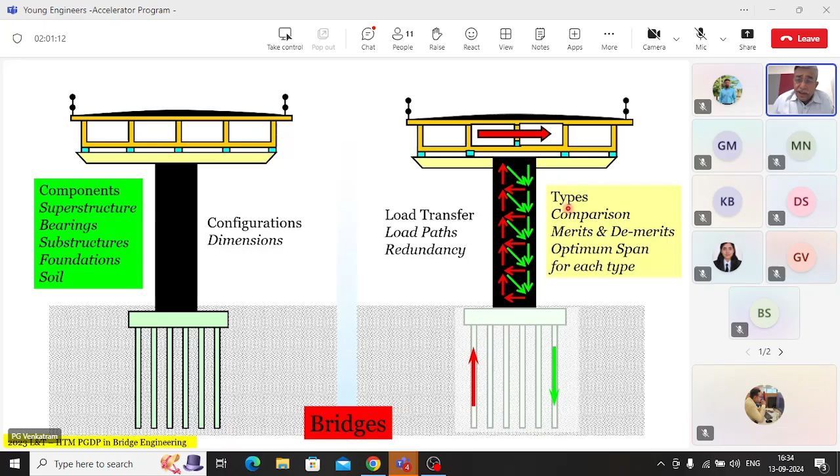So what we will do is we will start this introductory course with understanding of the evolution of bridges and what prompted the changes. We'll start with that, and eventually we'll go to the complex subjects about design, analysis, detailing, mostly at the concept level. Rest assured, I will not take you to intricate mathematical formulation, which will put you to sleep and also will possibly test my own personal knowledge of that level of mathematics.

Because ultimately, somebody like me is at the tail end of my career, and all of you are at the beginning of your career. In the sense, my 40 years are over, your 40 years have just started. So in that sense, what you see in the past will be a reflection of the nature of the path that is likely to be in the future. All right. So let's look at what prompted the changes.

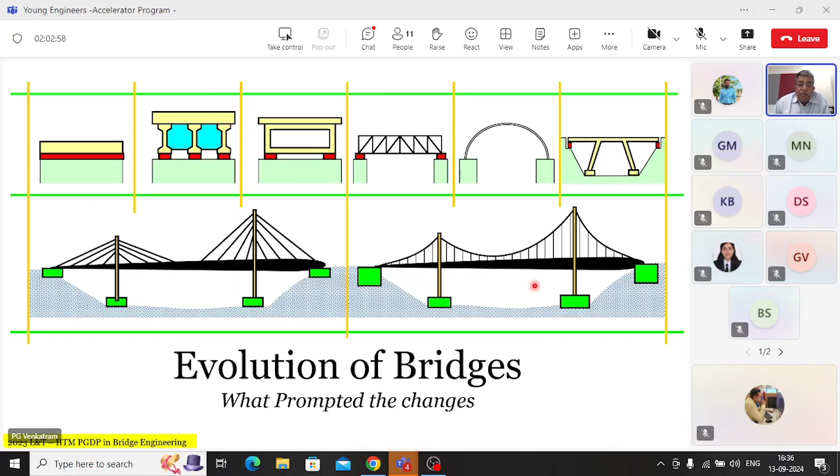Looking back at it, we can divide the whole history into about 5 periods. You can call one prehistorical, then the classical period from BC to AD, or the Christian era, CE as they call it nowadays. Modern day they use BCE and CE. Then you have Middle Ages, early modern, and modern, which is what we are living in today. After a few years, by the time some of you reach my age, what we are doing now will become early modern, and possibly there'll be postmodern, which will come up at that time.

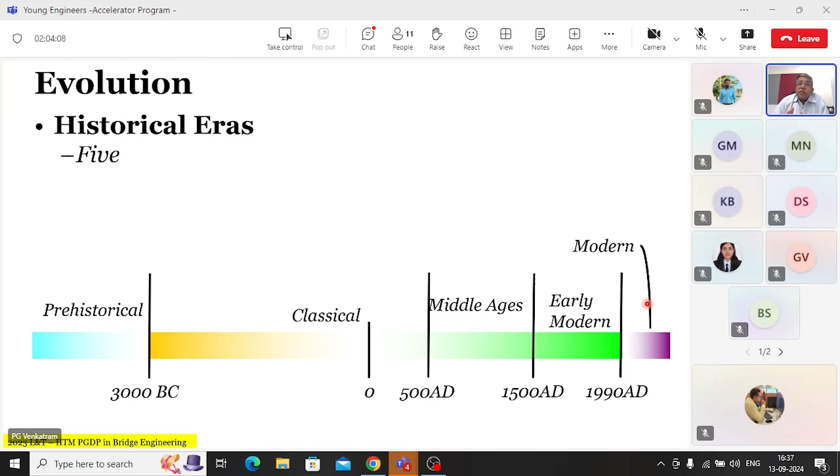Most of the prehistorical ones were not man-made; they were naturally occurring, and something in the form of a semi-man-made, naturally occurring arrangement which has been improved upon by human beings, such as the bridge in Taiwan.

Then comes the classical age. What happened from the prehistoric was only an idea we got. In the classical age, we understood proportion. We did most of the engineering in that era from what is called today gut feeling — load transfer, force, etc. Those terms were not defined yet. The forces, stresses, strains — they didn't have those concepts in the classical era.

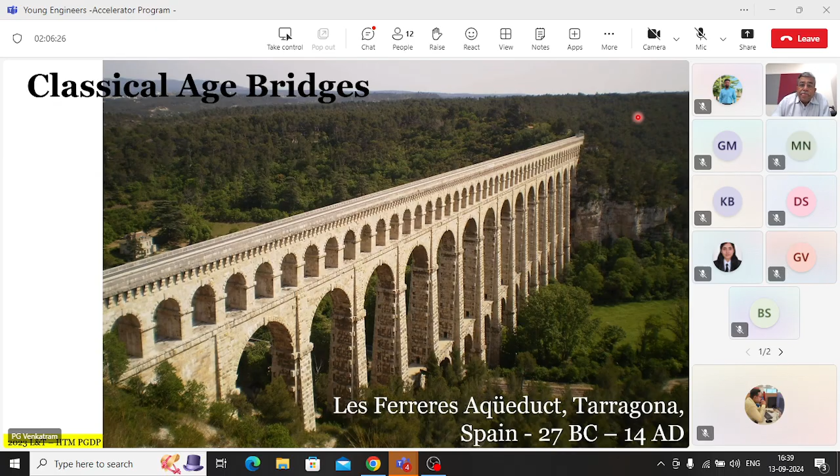In the early modern time, if you look back at the Middle Ages, we ended up using only naturally occurring material. The only thing we added artificially was cementitious material, and by that I don't mean cement of today's era. They used lime and other things they discovered — I wouldn't want to use the word invented, they discovered that mixing lime with a few other naturally occurring materials, after some time when mixed with water, becomes hard. They used that as a cementitious material with other natural materials such as timber, stone, and masonry.

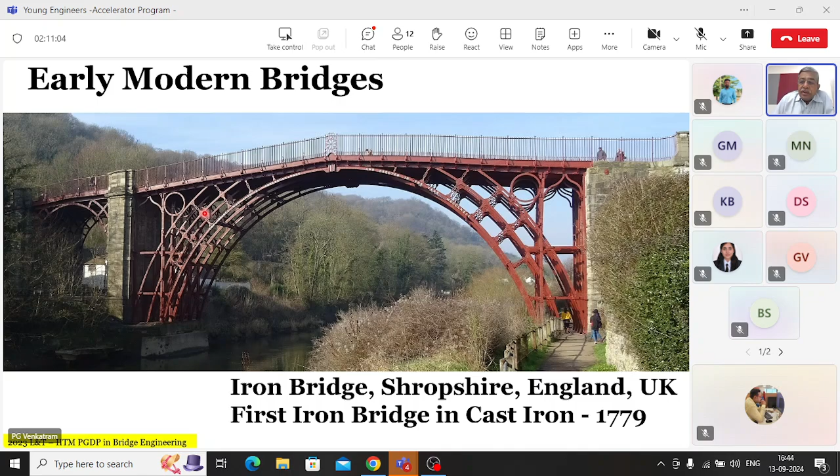So one of the earliest bridges, 1779, as you can see from this. Subsequently, the structural mechanics aspect started to get understood a little better, and also manufacturing graduated from cast iron to steel.

So when it came to steel, what did they end up getting? A material that is not only good in compression, under certain circumstances it's also good in tension because it has got what? Opposite of brittleness is what? Ductility. Because of this, and better understanding of structural mechanics that grew simultaneously, it became possible for them to build structures in which the force flow and load transfer mechanism became an integral part. So tension and compression they started to understand, and therefore steel bridges started to be made.

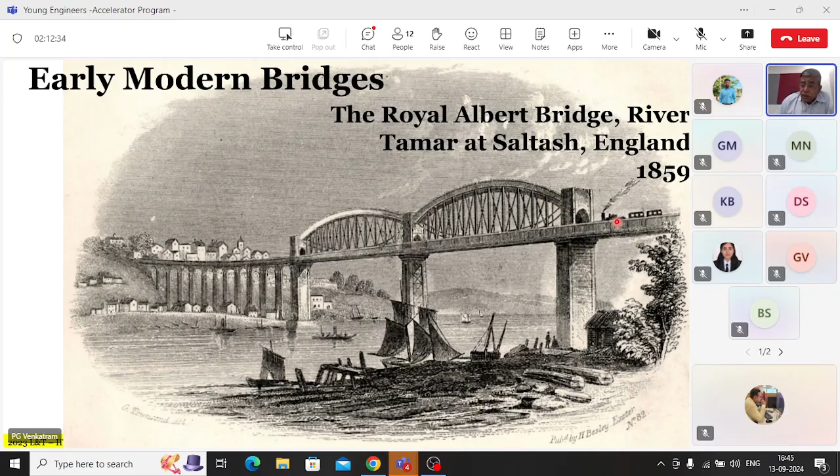Please remember the first one was an iron bridge. From iron bridge, it got upgraded in the next 100 years to being a steel bridge. They also started to take much heavier load, like a full train load was possible to be moved on such bridges.

An example of an early modern bridge, in the same period we had not reached steel usage in India, but we definitely ended up using a lot of arch bridges, most of them stone masonry arch, because India had a lot of good quality stones.

Now, how familiar are you with the availability of materials in different parts of the world? You're all familiar with the usage of concrete, right? Yes, sir. Okay, what type of aggregates do we use in making concrete?

All are stone. I said what type of stone? What type of aggregate? What type of stone? Okay, if I want to correct the question: gravel is related to size of the stone rather than the nature of the stone. I wanted to know what is the nature of the stone used in concrete production in India, or any project that you're familiar with, that you have seen.

Granite. Okay, what else? Metamorphic. Igneous. Don't go for complicated words. Granite is simple, there's another simple word. Another simple type, I should use the word simple type. Granite is one. Yes, what are in India? Igneous rocks. Oh, that's a common term. Granite is an igneous rock. There's another igneous rock.

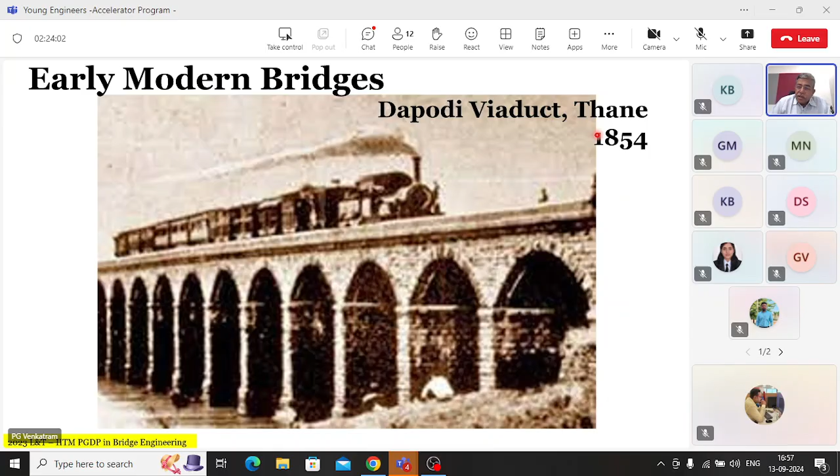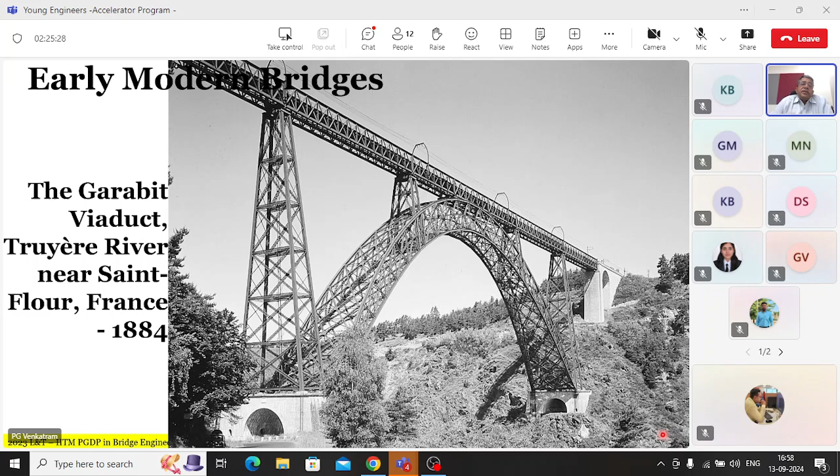So you can see the forms which were created when our understanding of structural mechanics and the mechanics of materials improved haven't changed much. Only the newer material, newer construction; we'll see that as one of the reasons for transition. So we are gradually moving from natural material to semi-man-made material to more or less 100% man-made material as we reach the early modern time.

So the structural mechanics principles and all the other design modernization that we ended up having, and as we come to the early part of the last century, we had a lot more fantastic structures designed and built, including this arch with suspenders for an intermediate deck in Sydney, Australia, and then we also got this arch bridge in France with a concrete arch, and you can see that the arch is becoming a lot flatter because with the usage of concrete as a material, we are a lot more confident. By that time the understanding of bending behavior, reinforced concrete, all of them had made an appearance by the mid 20th century. And again, it's a spandrel arch bridge.

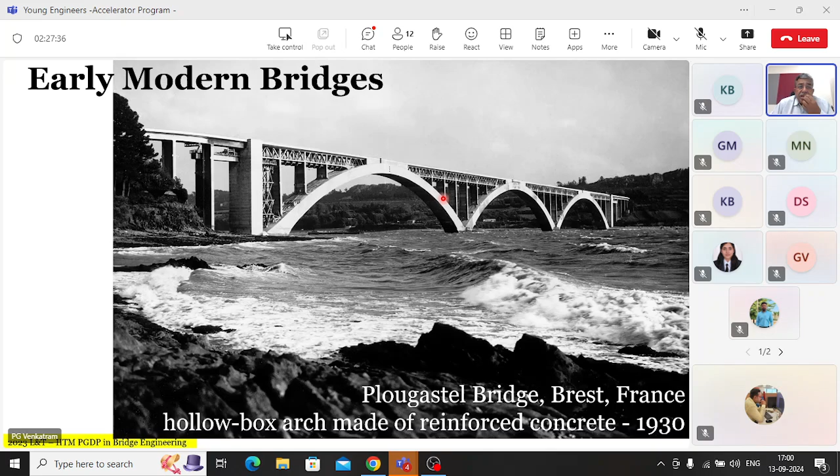Coming back to India, we had what we call an early modern bridge, but the foundations were more traditional, a masonry structure, and the superstructure was early modern steel plate girders and no concrete deck at all. The railway bridge across the Pamban, which goes to Rameshwaram from the mainland. It's a distance of about 3 to 4 kilometers.

It included one swinging span, which you can see in the picture here. It actually opens out like wings, and the opening mechanism is so well engineered that a labor of 2 or 3 people on either side is capable of lifting the whole span. It doesn't require complex power or anything. And remember, it was engineered and built more than 100 years back.

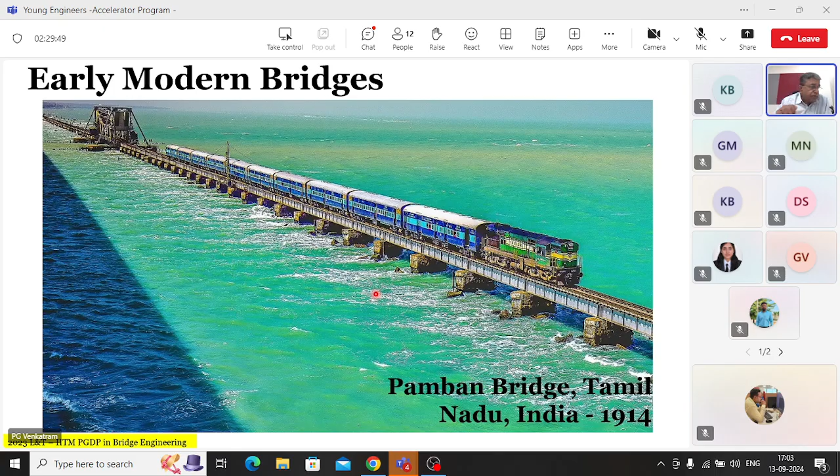And this is the very famous Howrah Bridge. If I were to ask you, what kind of bridge is this? Those from Calcutta? It is not balanced, let's put it that way. It is not balanced, but it's a cantilever bridge. You're right in the sense, because once you say balanced cantilever, it would mean that both sides are of equal weight, which is not quite true in this case.

It's an unbalanced span. However, it is a cantilever construction, which essentially means that the erection started from this side and finally ended up in a closure in the middle. And you can imagine this is also nearing 100 years of age. It's a truss, at the same time built by a cantilever method.

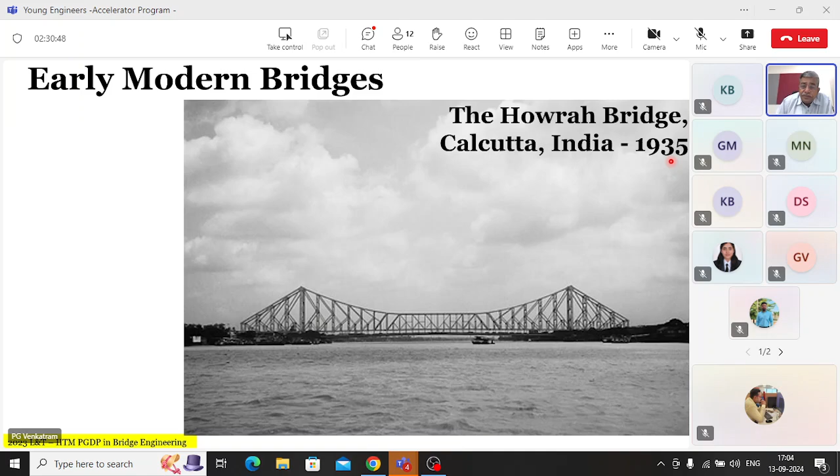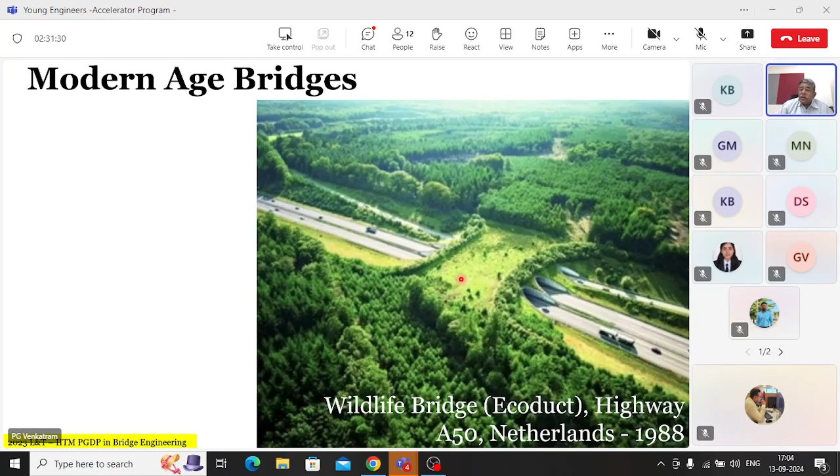Now coming back to modern bridges, we are also becoming sensitive to ecological requirements, and an example of an eco-sensitive bridge, where you had forest on both sides and a highway going through in between. The highway is also a necessity, while allowing access to all the animals and creatures that need to cross from this side of the highway to the other side. So a bridge has been made with all the greenery included on top. This is good, and this was built about 40 years back in Holland, but we are not too far behind.

And to prevent their ingress and egress, they all have safety fences which will continue to prevent those wildlife creatures from coming onto the expressway. So while the expressway will go underneath, the animals have a way to cross across. So in India also we are catching up. We are catching up on these concepts, making structures which are suitable to the local environmental conditions.

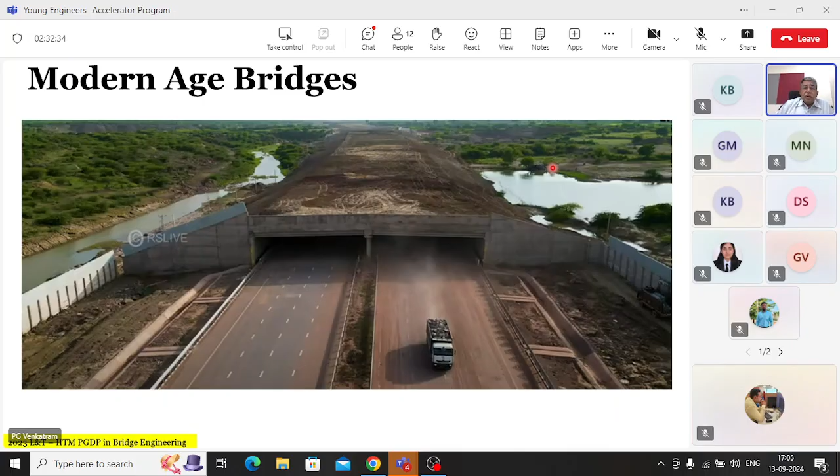Then the pinnacle of modern bridges is actually the suspension bridges, and this used to be, we can call it, the talk of the world in bridge engineering in the late 20th century, primarily because of the span, which was almost less than about 2 kilometers long. But this is no more the longest suspension bridge. The longest suspension bridge today is actually in excess of 2 kilometers, and I'm talking about the span from pylon to pylon.

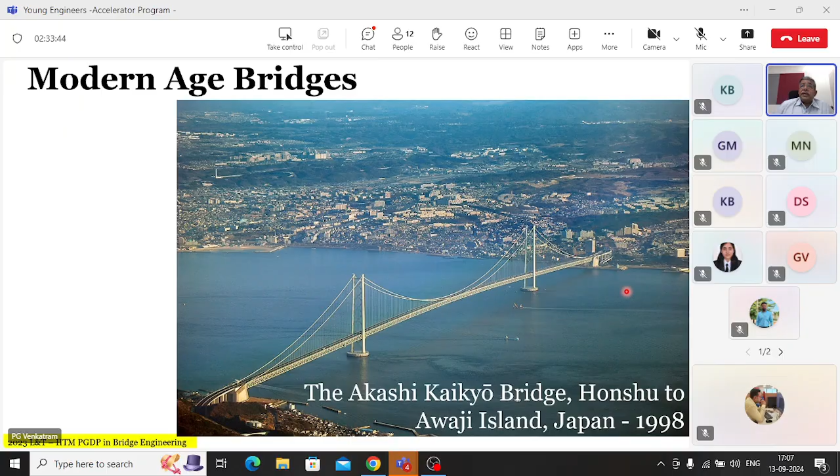And there is a plan to even build a bridge in Europe which has a pylon to pylon distance of almost 3 kilometers. So all these are advances taking place in the field of bridge engineering, which will require a lot more research, on the material side, analysis side, construction side, all of it put together.

Then coming back to the types of bridges. Now we had this transition. As I told you, we saw the calendar-wise transition from natural material to semi-natural material to purely man-made material. What helped this transition was actually three aspects. The first and the most important was the improvement in the material. We started to move from natural material to man-made material, thereby improving the availability, and we were also making sure that the materials were strong as well as ductile. Okay, that is the first

improvement which helped us transition from stone masonry bridges towards concrete, then cast iron, then steel, then reinforced concrete, then prestressed concrete, and then cable supported bridges. All of this was basically the improvement in the nature and quality of the material used in the bridges. The next phenomenon which helped us was improved analysis and design tools. We started to understand the behavior of these materials and structures better.

As I told you, in the earliest, the so-called classical era, most bridge construction was done on a proportional basis. They used to see nature, and they saw that in nature compressive load is transferred in this safe manner. Therefore, they used to replicate it. They didn't have a great understanding of stress, strain, deflection, etc. When all that started to be understood in a more rigorous scientific manner in the late 19th and early 20th century, we started to go to more modern forms of bridge design and bridge construction.

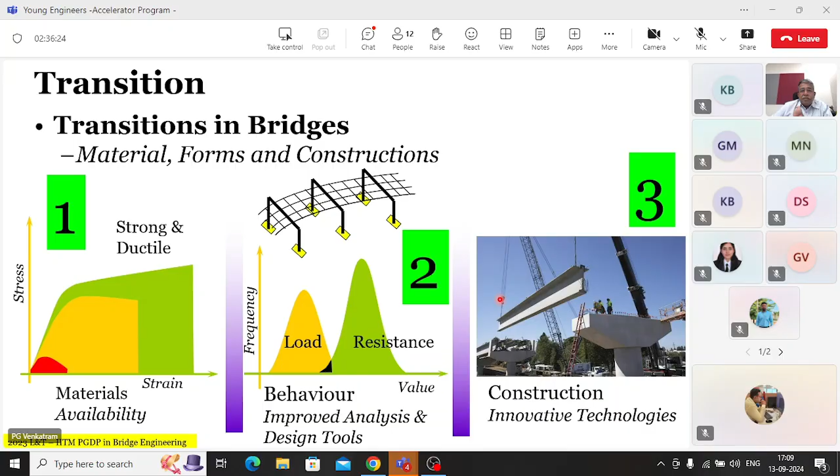And finally, of late, what is driving the transition to newer and newer forms of bridges? The construction technologies which are coming up at a very rapid pace, both in India and abroad, and which are giving us a chance to build different types of bridges, if you want to put it that way. So the transition is helped by material, behavior understanding, and construction technology.

Now, when you look at material availability, in prehistorical times we generally had wood and natural stone as the bridging material. By classical time, it became masonry. By the Middle Ages, it was masonry and, rather than steel, maybe iron is better. In the early modern era, masonry, steel, and concrete. And in modern times, it's invariably steel and concrete. Masonry has been phased out, you can strongly say.

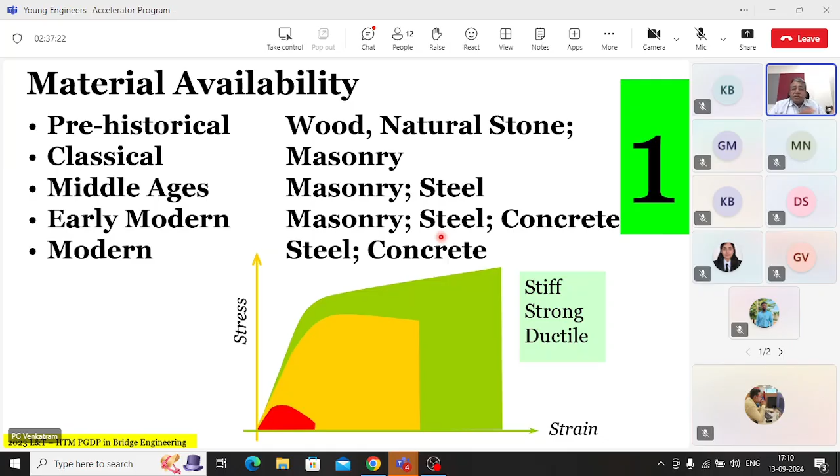And the materials were gradually moving from brittle, weak material to stiff, strong, and ductile. All these properties slowly kept getting improved from natural stone onwards till steel and concrete. So this is one transition which helped move from bridges of a certain type to what we call the modern bridges.

In terms of materials, this natural rock outcrop gives an idea of what a bridge should be, shape, etc. This is what the earlier thoughts were about. This was the first material that was used in a bridge. Then we moved on to dressed stone arches. As you can see, the stone arch. The idea came from this.

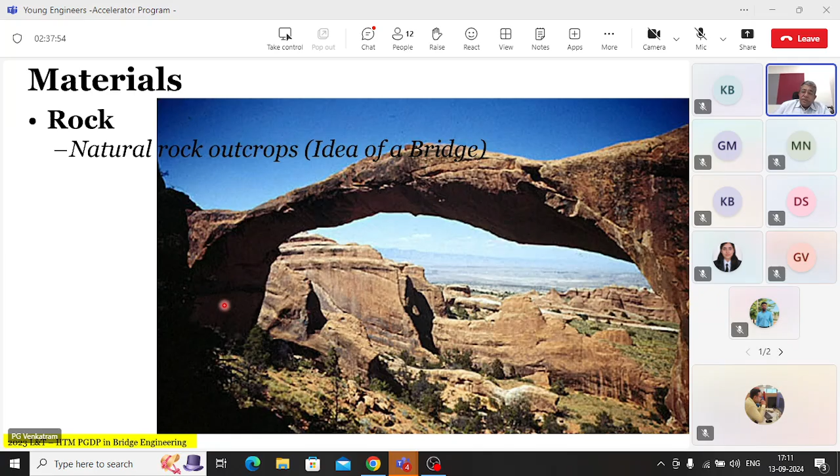You can see that this arch-like phenomenon naturally was standing safe and sound, and that is what gave the idea to the early bridge designers to go in for laying out dressed stone in this fashion. And the most important component is the so-called keystone, which is placed at the crown to exactly match. If that is not placed properly, this arch doesn't work. This was also understood over a period of time as a practice.

But most of these stone arch bridges came with an idea from something naturally occurring like this. Then, if you notice, we were still relying on compression as the main force transferring mechanism. So the arches were very tall. And what would this mean? That means that if there is a level here and a level here, one had to climb a lot in order to achieve this arch behavior. One needed to climb a lot and then come down again.

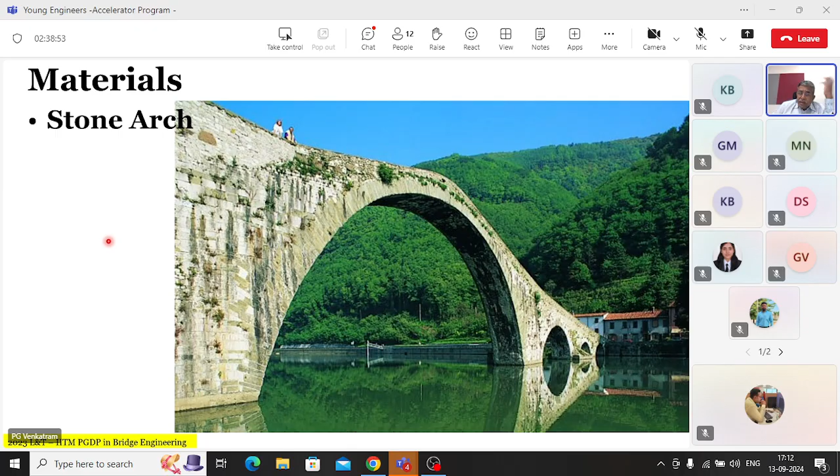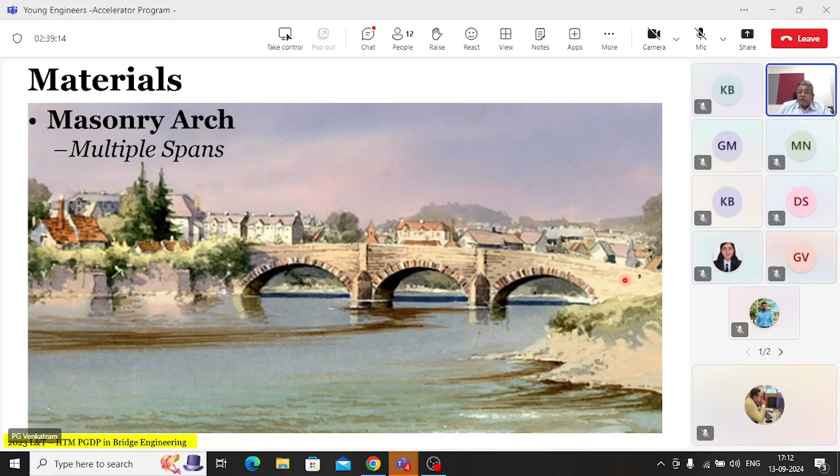This was modified by going in for both flatter as well as multiple arches, because the force transfer mechanism was understood a little better, and the large outward thrust being balanced by the buttresses at the two ends of the bridge. This was understood in the next stage of transition from a single arch to multiple arches, and from multiple arches to multi-storied arches, as you have seen in the aqueduct.

And then finally, we started to go for flatter arches, a shallow rise, because this became important so that we don't have to climb up. Remember, these are all in an era when there was no mechanical vehicle. So if you build a crossing, it had to be humanly possible to cross it. If you make it too steep, it will be used for very limited purposes. So in order to make it more easily accessible, for smaller spans, people started to attempt shallow rise, again understanding the load transfer mechanism and creating the right kind of buttress.

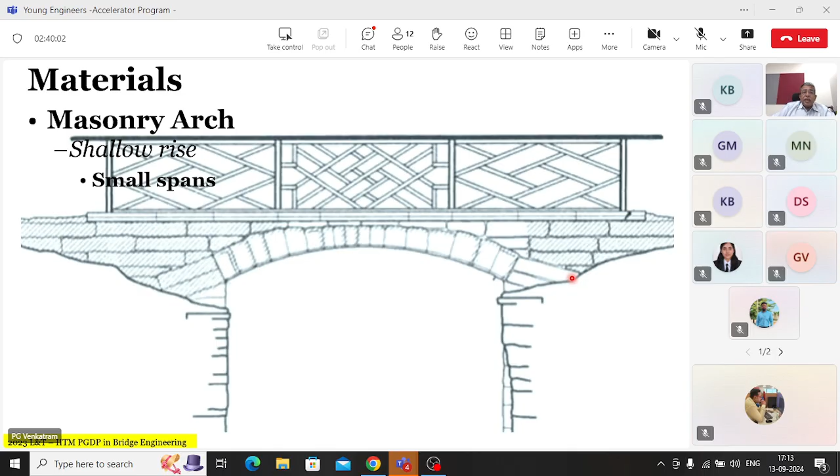An example of it is a viaduct; these are available in India too. India has almost a lakh of these masonry arch bridges. They are almost 70 to 80 years old, so there are great doubts about their residual life. A lot of them are likely to get replaced in the near future to keep our railway lines in operation. However, many of them are still robustly strong.

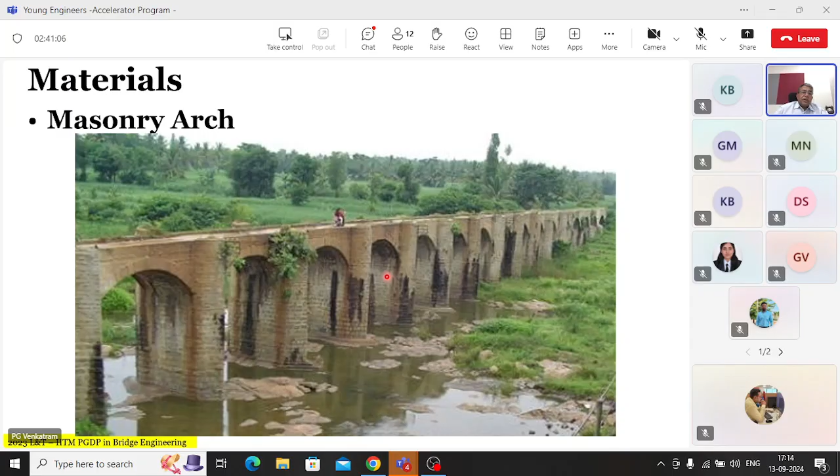Their biggest challenge has always been their performance in dynamic situations. All railway load creates dynamic loading, and under dynamic loading, all these joints are susceptible to gradual opening out and loosening due to the cyclic loading nature. So how well these joints are still performing is a big question mark. So there's a big exercise that has already started in replacing these very old masonry bridges with more modern reinforced concrete or prestressed concrete bridges to keep the railway line functional.

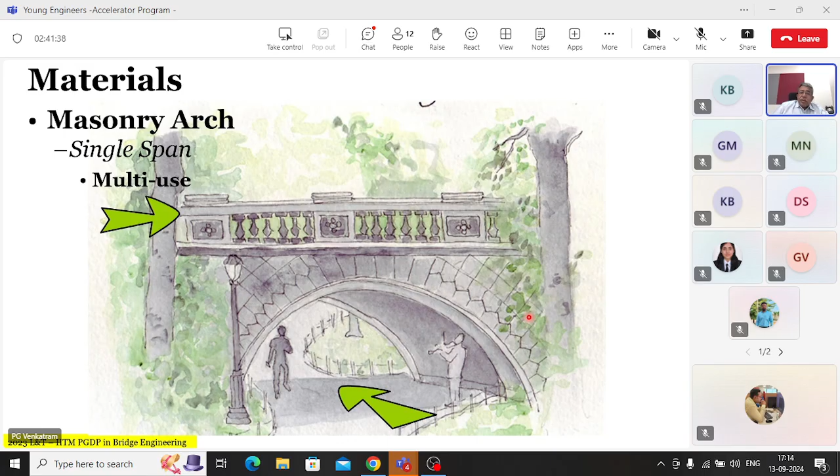Then you have arches which started off as single-use bridges. Then we started to use multifunctionality, in which we had a transportation problem solved below a bridge, and a recreational purpose at the upper level, which can be used as a viewpoint, passing time, leisure time, etc. So gradually human beings started to expand the scope of the bridge itself.

Then from one natural material like stone, we started to use natural material like wood also. These kinds of bridges were called informal light bridges. When I use the word informal, it essentially means you will not find any detailed calculations for the force transfer, etc. But they had what is called a proportionality rule.

They knew how much the tension force is, and they also knew that when you have this much load, there will be a tension force here, and to balance that, you need a strut, and that strut needs to be anchored strongly into the ground to prevent it from slipping down. How deep should this vertical post go? All these were rule of thumb based, very strong thumbs. Calculations nowadays, in the modern world, are a little different.

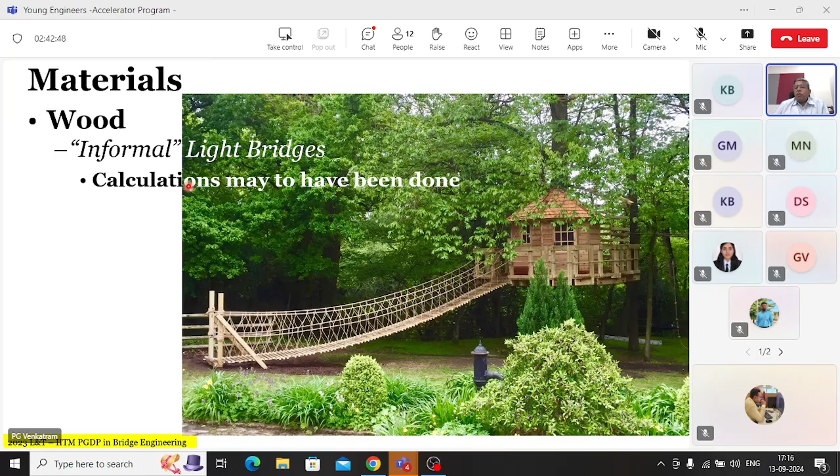You may have to do first principle based calculations. The wood became one of the means of bridge construction, though not for major ones. For smaller ones, it became the next choice of material for smaller crossings. Then wood and rope in combination addressed connectivity issues, especially in remote places where you had valleys to cross, small valleys, small fast flowing rivers to cross. So these were used again in semi-formal fashion in terms of experience and judgment based arrangement.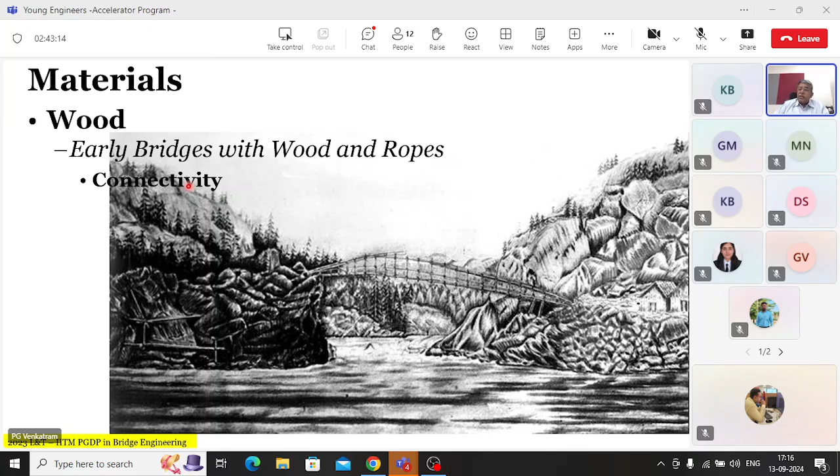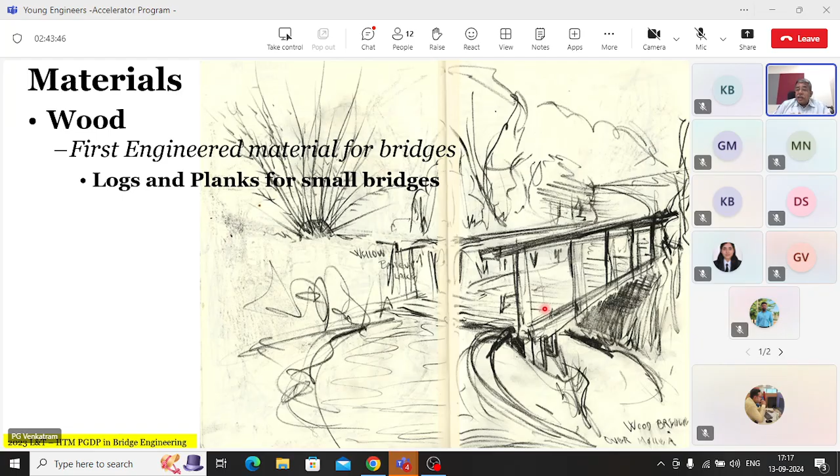Afterwards, when the wood use became a little better known, then the wood became an engineered solution. When I say engineered solution, it means it started to get used as a part of a truss. It became part of a structural arrangement which could take both tension and compression. Then they started to use logs and planks as walking surface, and logs to carry the tension and compression part of it. So joinery became an important issue, and then the similar ropes and wood combination were used.

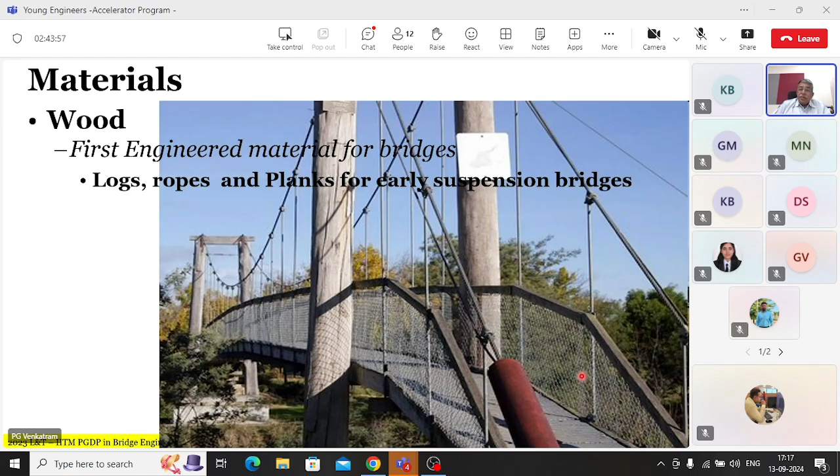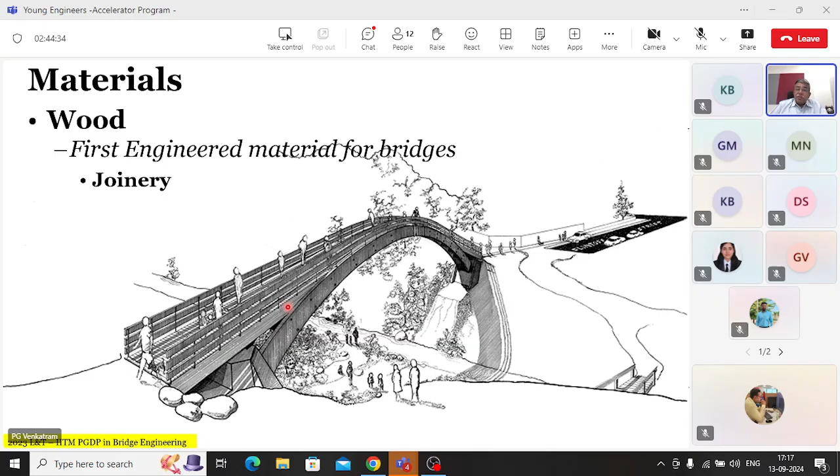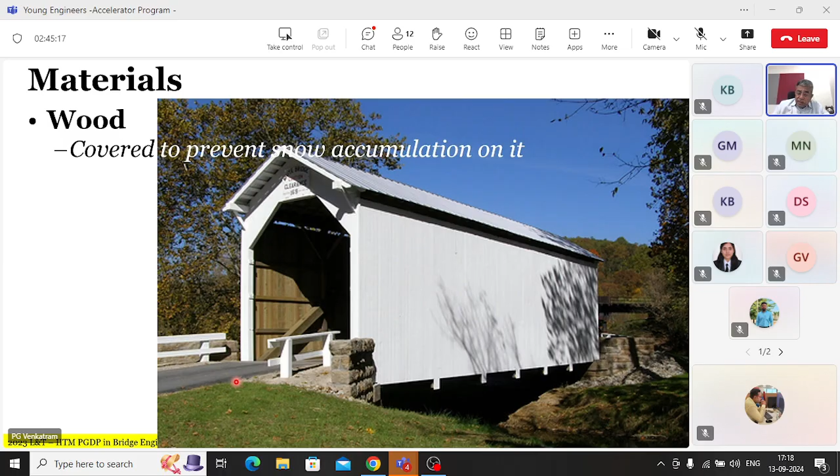So it became sometimes a critical link in small stream crossings like this, and sometimes it is also used for what we call protective measures. A wooden bridge with canopies to prevent snow accumulation, so that at least on the bridge crossing portion there is no accumulation, which lets the bridge be designed light. With this canopy the snow will all fall off, and the snow on the approach road can always be cleaned manually, and it is on the embankment, so it's not a great danger from a loading point of view. So wood was used as an engineered material for some time, generally for small bridges, small crossings.

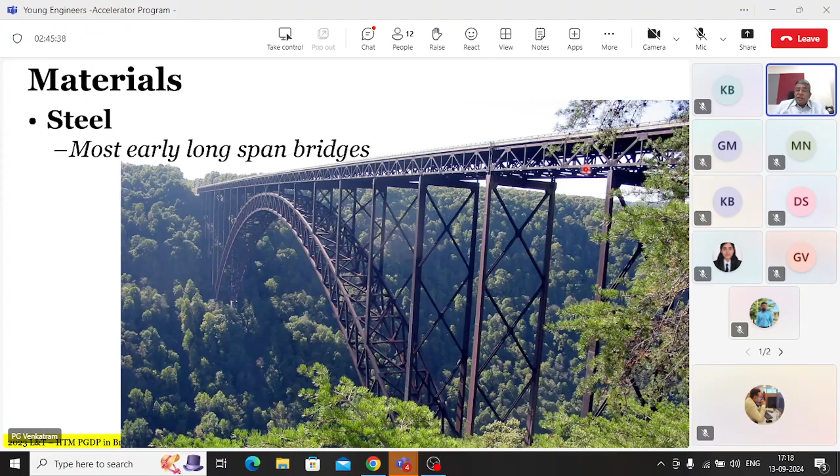With the arrival of steel, most early long span bridges were all made in steel, and quite often with arch-like construction, as you can see in this example, an arch with spandrels and a deck which has a conventional truss as a load-bearing member. And you also started to see other forms like arches. You have trusses, arches, through arches. All these started to become a part of bridge construction with the arrival of steel.

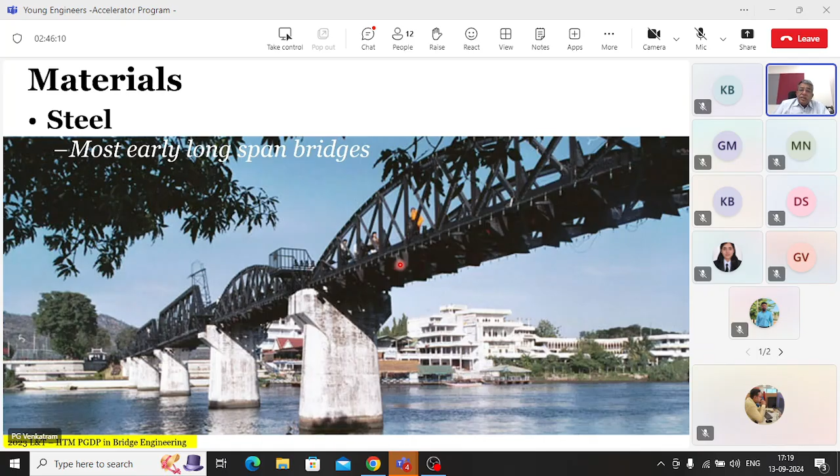So in terms of transition, we moved from wood, stone, timber to steel first, and afterwards with the discovery, or I should say invention, of concrete, it became the dominant choice. Though concrete is a brittle material, it still became a dominant choice because of its cost equation, its ease of production, ease of forming into different shapes and geometries, and transportation also became easier. If you had wood, you had to select the right kind of wood from a deep forest, bring it to the place of necessity, and do all the work. Whereas concrete offered all the flexibility in construction, usage, location, etc.

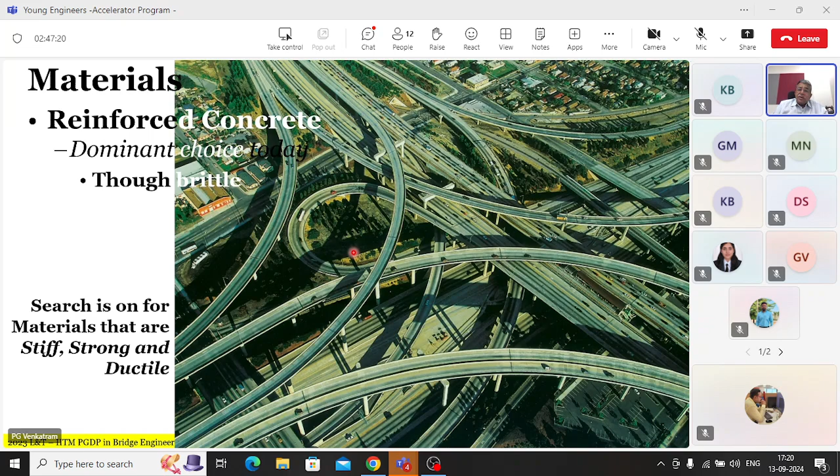Okay, so does it mean that we have ended our search for newer material? No. Today, concrete is the dominant choice in spite of being brittle, but the search is still on for materials that are stiff, strong, and ductile. Maybe in a few years' time, concrete would be talked about in terms of history, but until the cost equations are right, concrete will remain the dominant material in bridge construction.

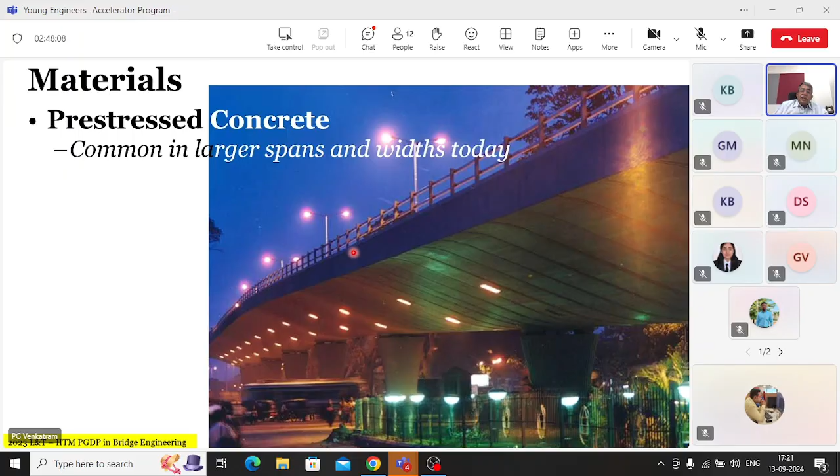Some of the brittleness was solved by the introduction of pre-stressed concrete, where we have stresses induced opposing the live load stresses, so that it increases the flexibility and allows construction of longer spans using concrete. Otherwise, with reinforced concrete, we could go only so far. The bridge deck became very heavy and very stiff, and we wanted flexible structures and longer spans. And for longer spans, concrete as a material was not sufficient. Then pre-stressed concrete was identified and invented, and that became a support medium to regular concrete. So we have seen the gradual transition of bridge forms due to improvement on the material side.

Now we started to understand the load transfer mechanism, structural behavior aspect, and improved analysis design tools. So initially we understood only arch behavior. From there we understood the beam behavior. From there we understood the truss behavior. Then we started to understand the suspension cable behavior first. And then we understood the pure cantilever with no support at the end.

Then we understood the box behavior when we started to look for torsional resistance. Then we introduced pre-stressing behavior to understand introducing ductility and flexibility with the slender section. And finally, we have reached a place where, please remember that suspension cable came much before stay cable. Stay cable is our modern day understanding of structural behavior, which incorporates aspects of truss, aspects of suspension cables, and aspects of bending behavior.

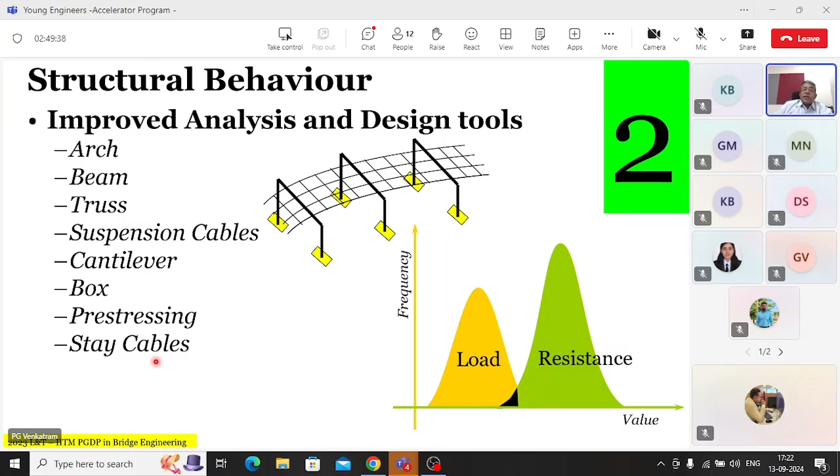All these things put together took us to a level where we are able to do stay cable bridges nowadays. All right. So this also led to different types of bridge construction as we started to understand the structural behavior, and the theories of structural mechanics and material mechanics started to get formulated. We will move on to understanding just bridge components, and we will stop for the day. We'll continue it in the next class.

In the bridge component, you have 5 major components. We have superstructure, which carries the live load. We have bearings, which transfer the load from the superstructure to the substructure. Then we have the substructure itself. We have foundation, and we have the soil. So these are the 5 major components of a bridge structure. You might be wondering why soil is a component of a bridge system. You will understand that a little later when we cover the load transfer mechanism and the soil structure interaction aspects, etc. But without understanding soil, it is impossible for you to do a bridge design fully.

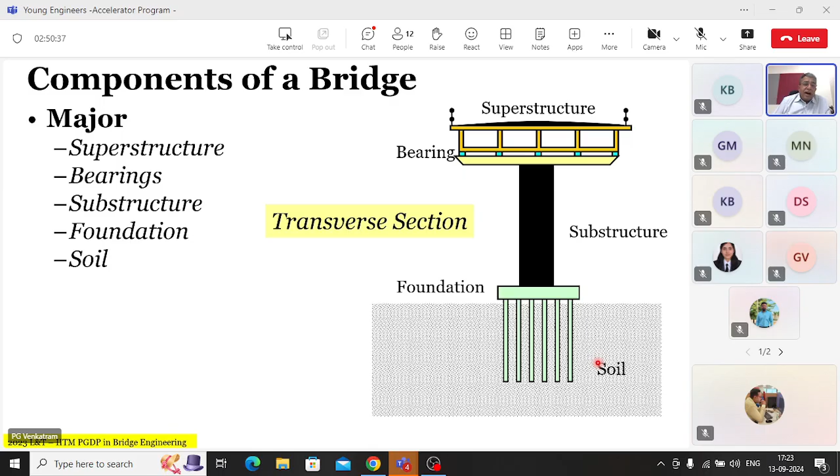Now if you look at it, that was in the transverse section. In the longitudinal section, apart from this, additionally there is an abutment at the end of the bridge, which we treat like a substructure, and an embankment which is on the earthwork. So substructures could be piers or abutment, and foundation could be shallow or deep depending upon the nature of the soil.

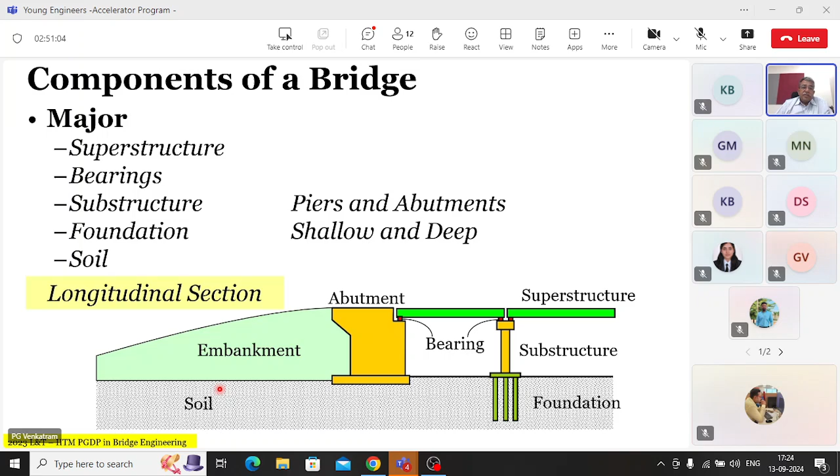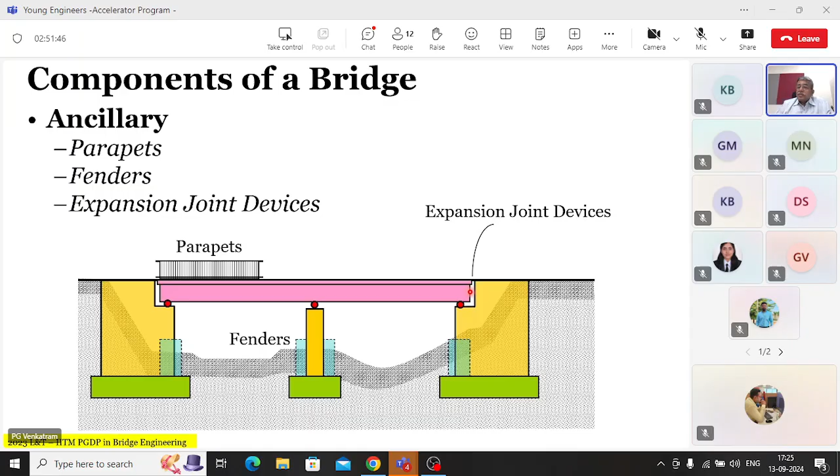We also have other miscellaneous components of bridges, which we will talk about in other classes, which are basically parapets, which are to prevent accidental falling off from the bridge of the vehicle, live load, passengers, pedestrians, etc. Fenders, which prevent impact of any floating body onto the substructure and foundation if it is a water bridge, or sometimes even on a road to prevent accidents from impact of vehicles. And we have expansion joint devices, which we will deal with separately later when we talk about the various phenomena associated with bridge deck behavior. So a system of a bridge consists of all these 5 components.

Now, which is the most critical of them all? Bearing. Okay. Everything, sir. Every part of the structure is important, sir. Yes. Anybody agree, disagree with that? So I got one answer as bearing, one answer as all of them are critical. Anybody else with a differing opinion? The foundation. Okay, so one believes foundation is the most critical. Soil. Okay, so you believe soil is the most critical. So I have 4 opinions: soil, foundation, bearing, and all of them are critical.

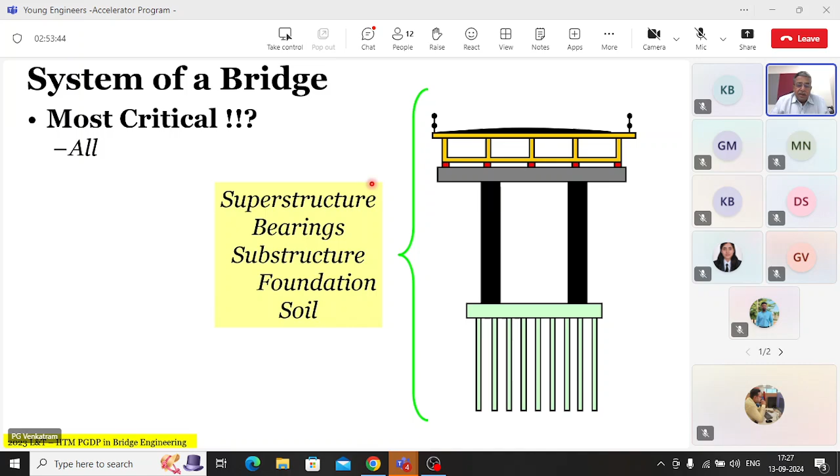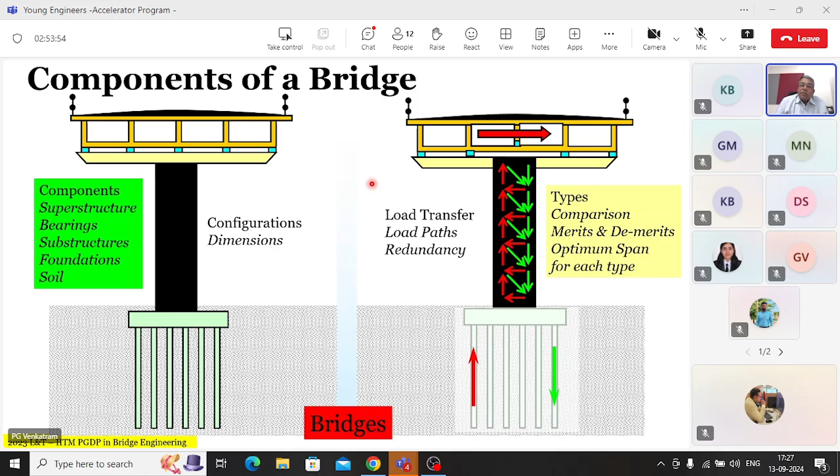Any other view? Okay. So the person who answered all is right. There is no component of the bridge which is not critical. You cannot say this is more critical, this is less critical. All of them are critical. So you need to have a clear understanding of every aspect of every component of the bridge structure before you come up with a good solution. So we will see the components of the bridges, load transfer mechanism, merits, demerits, options, etc. for each type in the subsequent class.